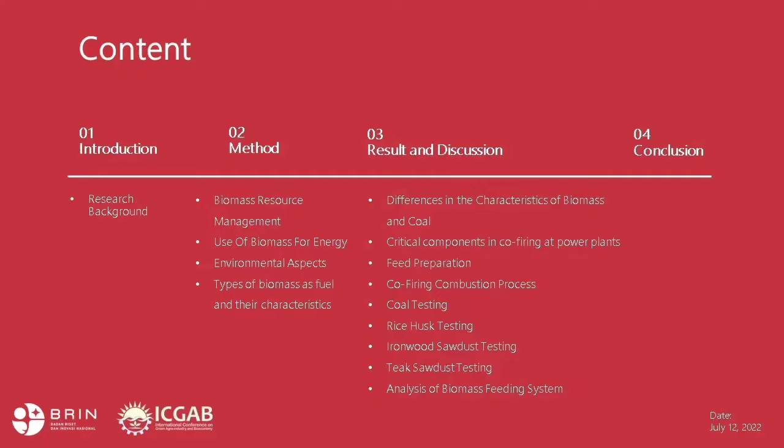Our research topic is Review of Types of Biomass as a Fuel, Combustion Feedstock and Their Characteristics. We're here this afternoon to talk to you about agricultural issues that we feel can be utilized for another purpose. And this is our explanation. This is the content of our presentation. First, introduction to our topic.

Biomass is organic matter produced through photosynthetic process, whether in the form of product or waste. In addition to being used for primary purposes of fiber, foodstuffs, animal feed, vegetable oils, building material, and so on, biomass is also used as a source of energy. Utilization of waste as fuel gives three direct advantages.

First, an increase in overall energy efficiency, because the energy content contained in waste is quite large and will be wasted if not utilized. Second, cost savings, because often disposing of waste can be more expensive than utilizing it. Third, reduce the need for landfills, because the provision of landfills will become more difficult and expensive, especially in urban areas.

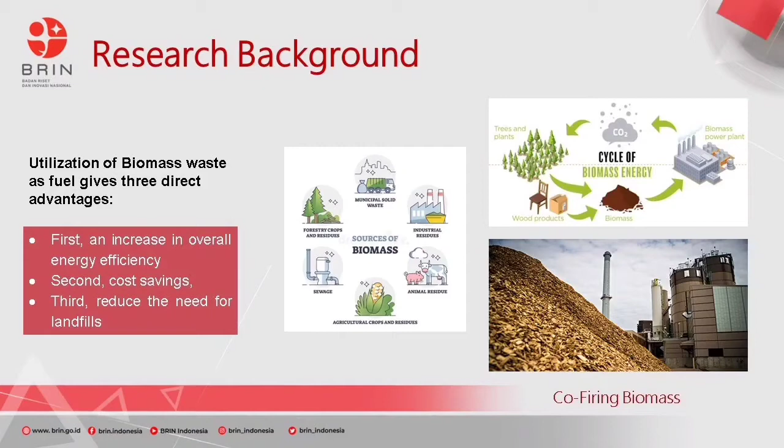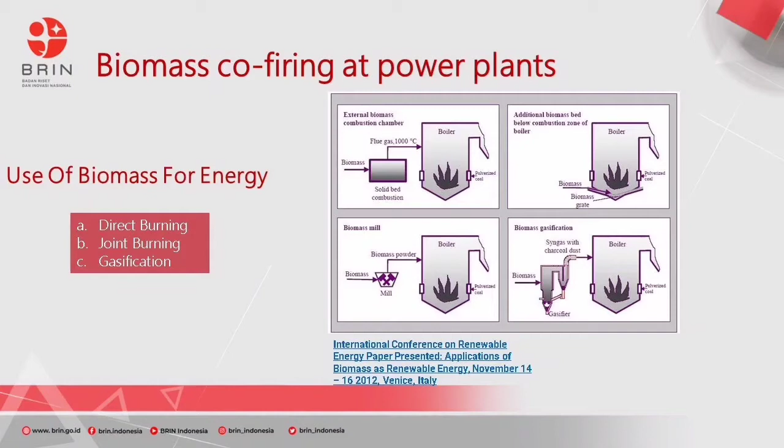Next, the biomass materials used in the study are three: rice husks, ironwood sawdust, and teak sawdust. These three biomasses are compared with coal as the main fuel in the CFPP, or coal-fired power plant. First, rice husk. The husk is the part of grain in the form of dry, scaly, inedible seed. Agricultural waste such as rice husk can be used as an environmentally friendly and economical energy source, but until now rice husks have not been optimally utilized as an energy source.

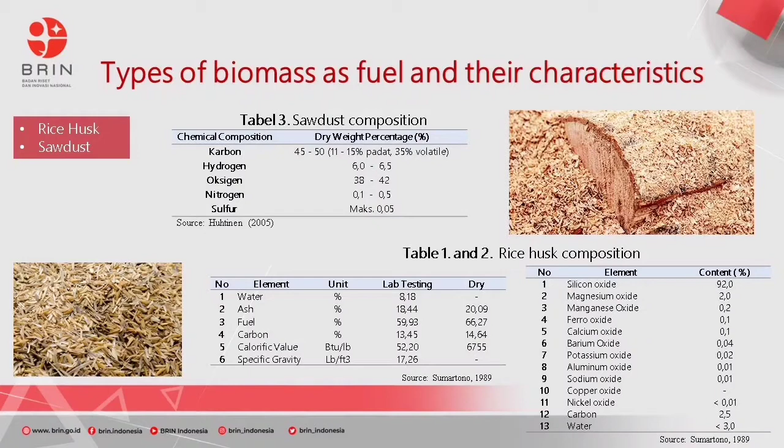Research method. The picture shown is a biomass testing. Material characteristics have been tested in the laboratory to determine the content and properties related to the characteristics of the power plant. Figure 2 shows the testing activity of the characteristics of materials, namely rice husk, ironwood sawdust, teak sawdust, and coal. The next is result and discussion.

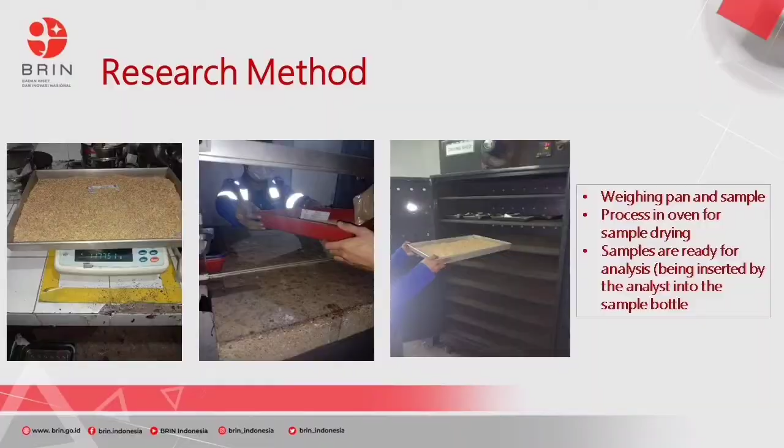First, coal testing. The results of coal testing using the ASTM method are shown in table 4 below. The test results show that the gross calorific value of coal, or HHV, is 5,217 kilocalories per kilogram with a moisture content of 11.43% and ash of 8.36%. The relative density of coal is 1.412 grams per milliliter.

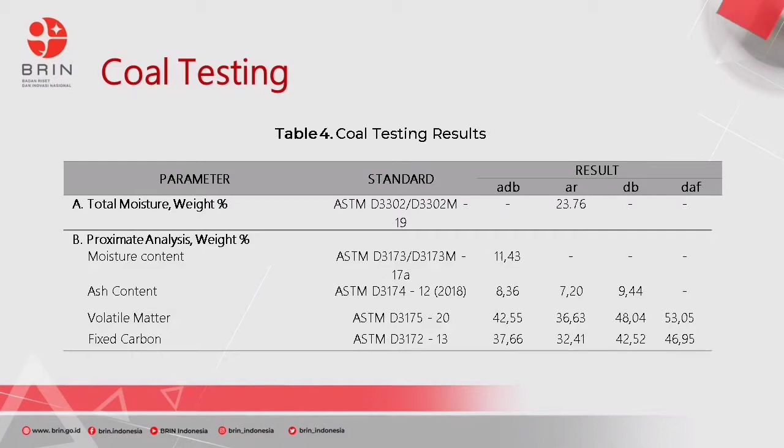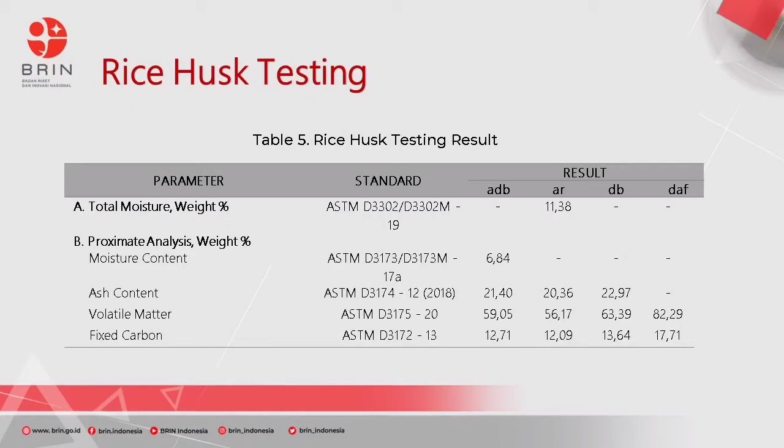Next is rice husk testing. The results of rice husk testing using the ASTM method are shown in table 5 below. The test results show that the gross calorific value of rice husk is 3,380 kilocalories per kilogram, smaller than coal, while the moisture content of 6.84% is less than coal. The ash content of 21.4% is much greater than coal. The volatile matter content, which is 59%, is about 10% higher than the coal, and fixed carbon of 12.71% is much lower than the coal.

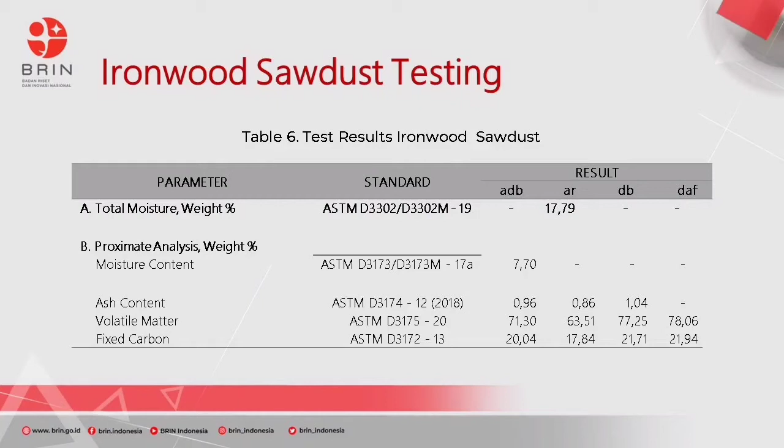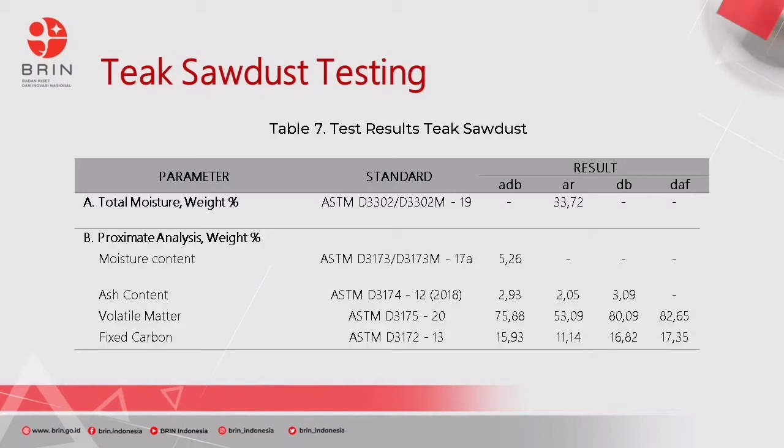Next is analysis of the biomass feeding system. Things to consider in the biomass feeding system into the boiler, especially for CFB type boilers, include first density and particle size. The density, together with the particle size, actually determines the fluidization character of the biomass material in the mixed materials. With a low density, it tends to be more easily carried by the air than the coal.

With the same air velocity, biomass particles which have density smaller than coal are possibly carried higher and burn at a different location than the coal, and cause different temperature distribution in the combustion chamber. Therefore, one of the requirements that must be met in mixing biomass is minimal density. If the minimum density is not met, it should be considered to first process the biomass particles into pellets to achieve the minimum density requirement.

For mixing less than 5% by weight of fuel, it's estimated that there is no serious problem with mixing rice husk because all rice husk will burn out in the combustion chamber. For larger quantities, it is necessary to consider converting them into pellets to increase the density close to that of coal, so that they approach the flying characteristics of coal and are more manageable to burn out in the combustion chamber. For sawdust with a higher density, it is easier to regulate the airflow to keep it burning out in the combustion chamber up to a higher biomass ratio.

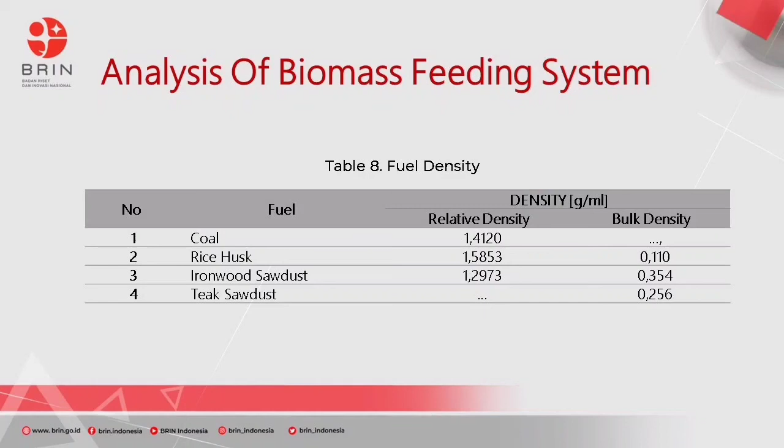The next is the conclusion. From the test results of the characteristics of fuel to be used for biomass co-firing at the power plant, in the form of coal, rice husk, ironwood sawdust, and teak sawdust, it can be concluded as follows. The values of coal, rice husk, teak wood, and ironwood calorific value, volatile matter content, fixed carbon, moisture, and S are shown below. The bulk density of biomass is lower than coal, especially rice husk, which is only 0.11 kg per liter, and needs special attention in its preparation so that it can be mixed well with coal and can burn out in the combustion chamber under the same fluidization condition as coal, especially when mixed in a portion greater than 5%.